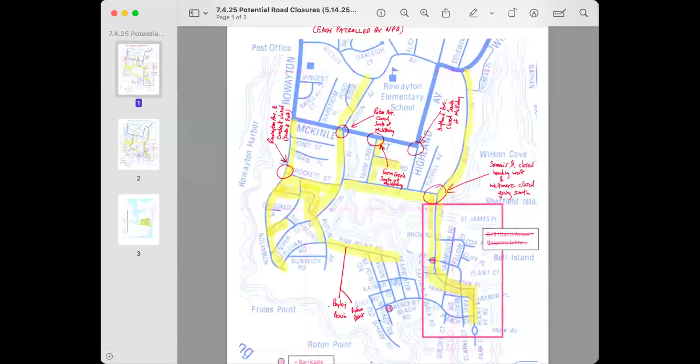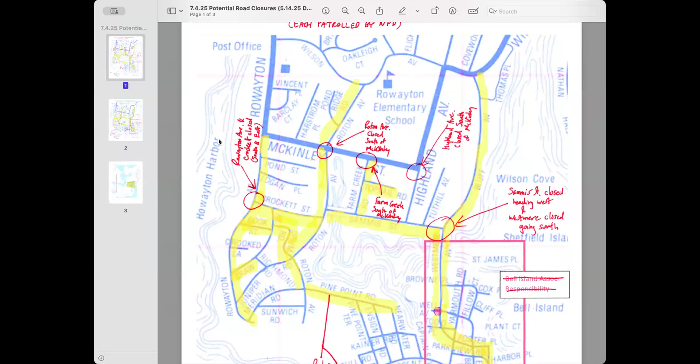So everything highlighted in yellow is going to be no parking, and we have designated specific areas that we've circled. Obviously this is a rendering, we're going to do a much better job depicting this as we get closer to the event. But as you can see here, road closures prior to the fireworks display - so we see where each area will be patrolled. And these are road closures after the fireworks display.

There's a few anomalies here for everyone's reference. There's two beach clubs, so we're in communication with both to ensure they're moving their traffic away from the perimeter of Bailey Beach, where 85% of the traffic will be coming out of. This is again handwritten, but gives you a bit more perspective on some of the evacuation routes and things we're working on. We will make sure this is uploaded, and we did share this with the Norwalk Police Department last week.

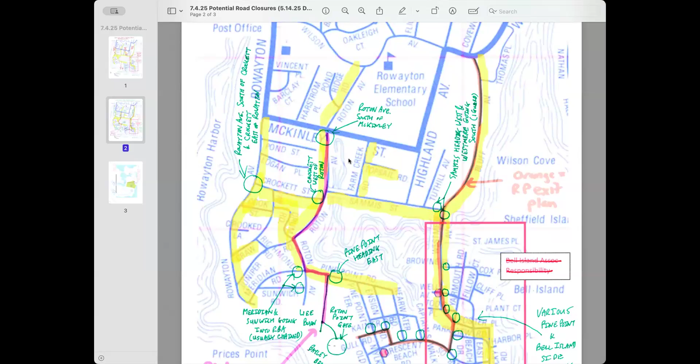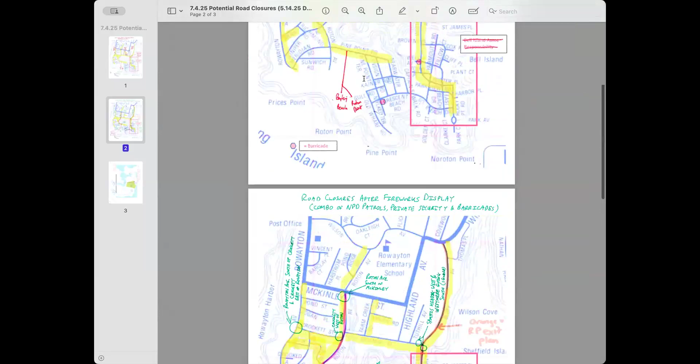And would there be sufficient detour signage with regards to the closures? From my perspective, from the RCA's perspective, yes, we're going to be working closely with Norwalk Police to ensure we're in compliance with what that should look like. Including the traffic authority, right, with regards to the detours - if a person sees something closed and there was no signage prior, there could be an issue there, right? Correct. Yes sir, so go ahead Commissioner Palladino.

Is this going to come before the commission like normal road closures do, or has this already been set? TMP staff has not reviewed this particular set of road closure maps. It seems like Norwalk Police Department may have discussed this with them, but with the events on July 4th, there is a potential we could bring this before the commission one more time at next month's meeting. And if the chief feels that's not needed, and the rest of the commissioners concur, I'm good with that. Not unless the board wants to.

Tony, do you have any comments on Commissioner Palladino's suggestion? The only suggestion I could consider is subject to the traffic authority's review and consideration, that it doesn't obstruct - that the closing of these streets are well planned and the signage is there to detour the traffic, and it's not going to create some bottleneck that we can't anticipate now. Okay, that's a very good reason for

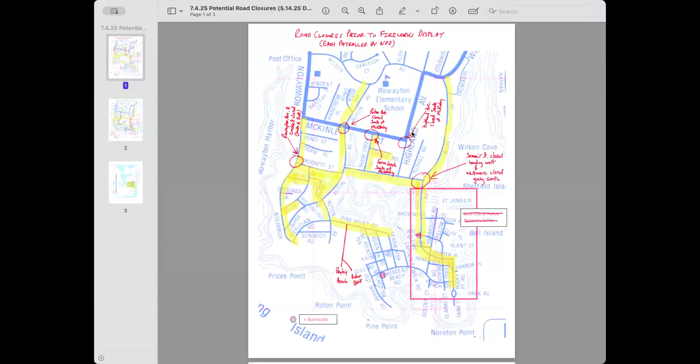That's Connecticut State. Yeah, so the route that trucks are supposed to be taking, if they're going through Rowayton, remains open. I think during the event itself, local deliveries would be limited, but I think that applies to all traffic, and it's going to be a Friday night, a holiday night, so I think that's going to be pretty limited, if at all.

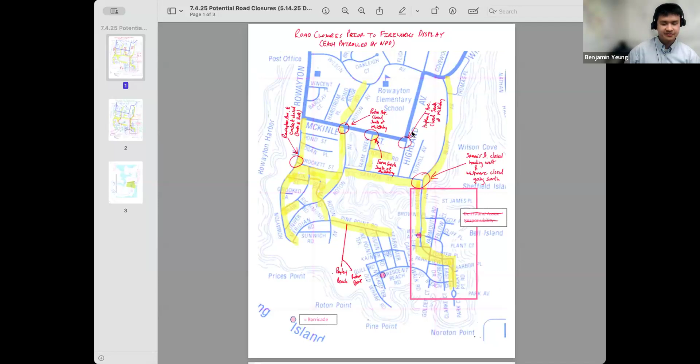Thank you, Mr. Yeung. Are there any other questions, commissioners? Police department? I have none.

Okay, well, I will entertain a motion to approve this application based upon our discussion of having a detailed map drawn by TMP, have it coordinated with the police department, and that's it. I move section 5, item B, subject to approval and coordination with both the traffic authority and the police department on approving the proposed exit route for the Rowayton fireworks.

All right, all in favor? Aye. Aye. Aye. The ayes have it. The item is approved.

Our next item is item C. May I have a motion for discussion? Approve proposed full closure on North Main Street, Washington Street, and South Main Street for the SoNo Arts Festival.

I need a motion for us to discuss that. I'll move section 5, item C, approve proposed full closure of North Main, Washington, and South Main Streets for the SoNo Arts Festival. Okay, it's been moved by Commissioner Palladino. What staff, is that you, Benjamin, again?

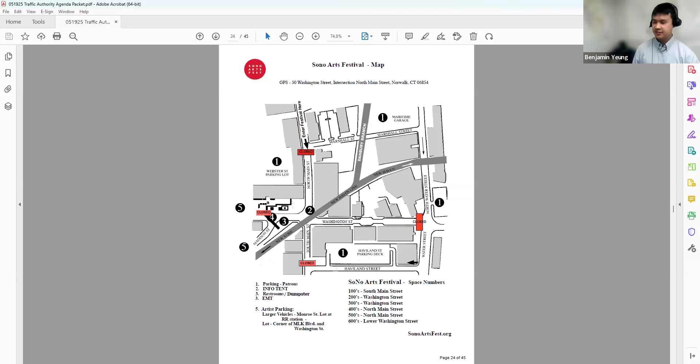We have the event lead, Sue Brown Gordon, in the audience here. I'm here, can you hear me? All right, Ms. Gordon, good afternoon. You can lead the discussion on this event.

Certainly, thank you so much for having me. I've been with this event on and off for almost 35 years, and it's been running very smoothly. We're not making any significant changes to the footprint or any of the closures from last year, which I think we'll all agree went very smoothly.

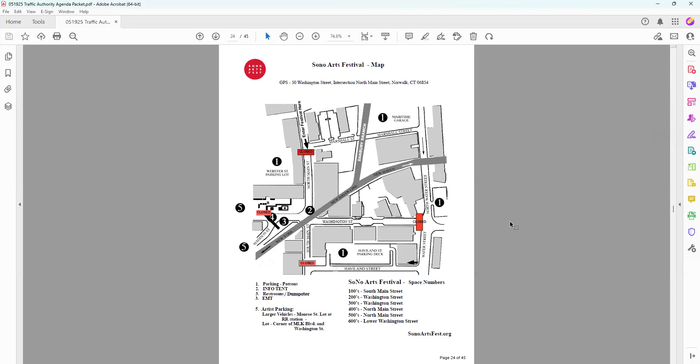No major changes. I'm going to meet with police to make sure that they're happy with everything and comply in any way to any of their recommendations. And I'm happy to answer any questions. While it is a big event, we've been doing it successfully for all these years.

And unless you have any suggestions, I think that we're going to continue the way we've been doing it, and we were very pleased with last year. So I'm here to answer any questions or concerns that you might have.

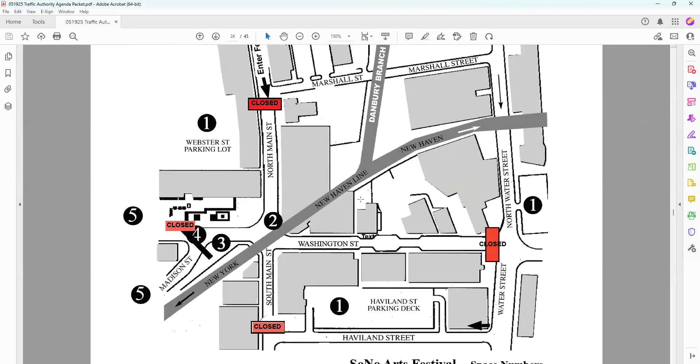All right, commissioners? I have none. From the past years, we haven't had any incidents or issues, and as you said, nothing has changed. So I can't anticipate other than something I'm not aware of, but it looks good to me. So I have no questions.

I have no questions. I just want to say that this is really a great event that we have in Norwalk annually. I have a picture that I bought when I went my very first time, and I enjoy looking at it every day. So I think that all is in order.

Chief, are there any concerns that the police department has about this event? No, Commissioner. Okay, all right.

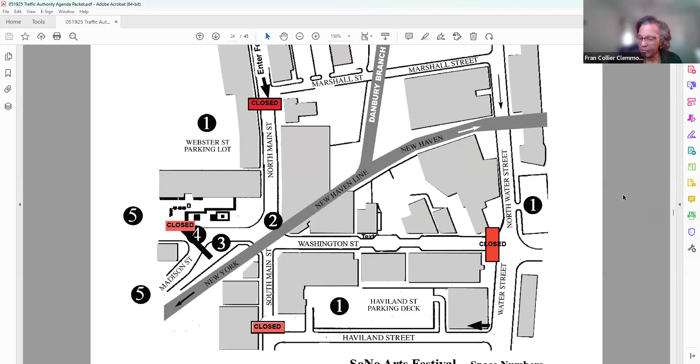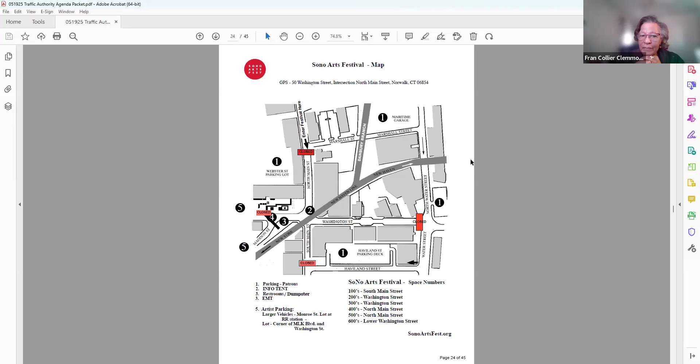I will entertain a motion for approval of item 5C. I need a motion to approve. Motion to approve item 5C. All right, all in favor? Aye. The ayes have it, and it is approved.

Thank you, good luck, success this year. Thank you very much. And I just want to state that I'm a Norwalker. I've been here since 7th grade. It's an honor and a privilege to provide art for our town, and I'm grateful to be here. Thank you so much.

Thank you. The next item on our agenda is item D, High and Knight Street one-way conversion. I need a motion to discuss that. I move section 5, item D, approve the one-way direction conversions of High Street and Knight Street.

All right, thank you. Mr. Young, would you lead us into the discussion? Thank you, Commissioner Collier-Clemmons. Actually, Mr. Garrett Balella from TMP will be leading the discussion on this one. Okay, great, thank you, Ben, and good evening, commissioners.

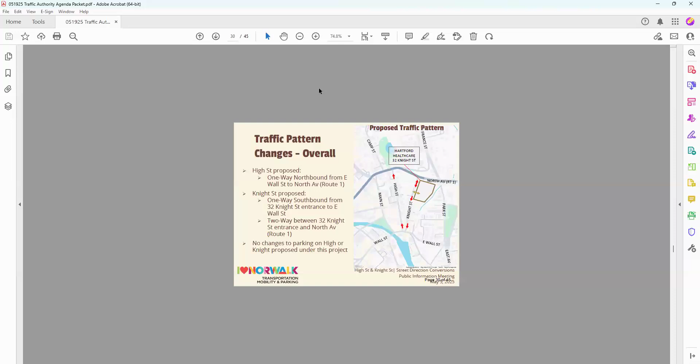I just want to make sure you can hear me all right. My apologies, my video isn't working today. I just switched over laptops and I'm having some camera issues. But I'll ask that my team share the presentation. We provided a lot of information in the packet. I wanted to provide a high-level summary and overview, and then also be available to answer any questions you might have.

The item before you tonight is to approve the one-way direction conversions of High and Knight Street. I want to emphasize that both of these roadways today are already one-way. We're simply providing a recommendation to convert High Street, which is one-way southbound today, to one-way northbound in the future, between East Wall Street and Route 1. And also to convert Knight Street, which is one-way northbound today, to one-way southbound between 32 Knight Street, which is the new Hartford Healthcare building, and all the way down to East Wall Street.

So this project largely originated to address historical operation and safety challenges that we have on Wall Street, East Wall Street, at the intersection of High and Knight. These are existing operational and safety challenges, and it's crucial at a time when we're investing nearly $30 million into the entire Wall Street neighborhood, that we make these changes to accommodate the future neighborhood plans, which had a tremendous amount of input and feedback from the community.

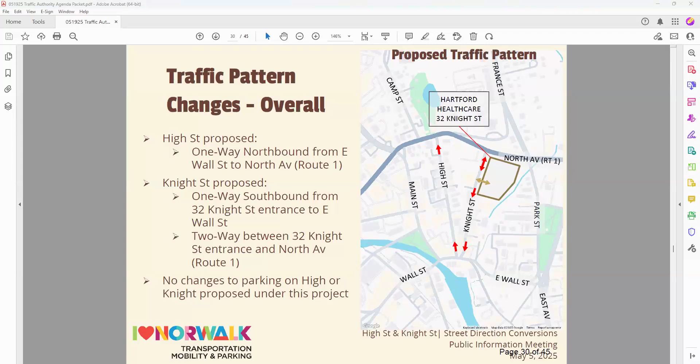So I'll ask you to go to the next slide, Ben. This slide really illustrates the issue that we have at hand. The operational and safety concerns I'm speaking to today are largely a product of two things. The first is that the roadways of High and Knight Street intersect at a very sharp angle. We're limited with our right-of-way, and we can't really rebuild the intersection configuration and change the alignment of these roadways.

So what we did look at is the circulation, and today there's a counterclockwise circulation between High and Knight Street, with High Street being one-way southbound and Knight Street being one-way northbound. It really exacerbates this issue, which you can see here in yellow, of people and drivers making illegal contraflow maneuvers from High Street to Knight Street, directly opposing cars coming down the hill from East Wall Street and traveling to the west. So this is a challenge we've recognized and that we're looking to address with this potential roadway conversion.

Additionally, you can see from this diagram just the way the roadways are aligned today. The reason this illegal movement happens so frequently is that it's very difficult for someone to come down High Street, cross the double yellow center line, immediately make a left turn, find a gap in traffic, and then head over to Knight Street. So the roadways just really weren't designed to accommodate this movement.

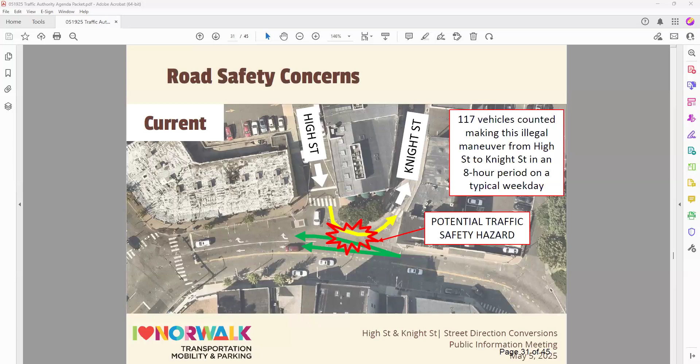If we could go to the next slide, Ben. This slide shows the issue at hand that we're trying to resolve. You can see the vehicle traveling east at the very top of the picture by the lights in front of Ahi, and then you can see vehicles coming down the hill on East Wall Street.

So while for many years we couldn't switch the roadway configuration, maybe because the sight lines coming out of Knight Street weren't adequate, this new infrastructure we're building now makes that possible. It makes it safe, creates lower speeds, and will create gaps for people and business owners to get out of Knight Street.

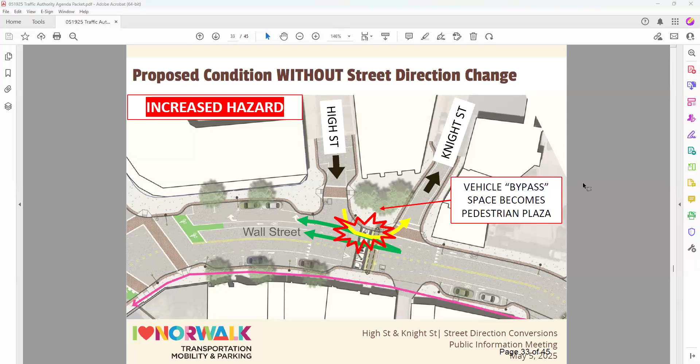Okay, commissioners, your questions? Yes, I have a question, Mr. Bolello.

So I think it's self-explanatory, and definitely an improvement. My question may not pertain to what's at hand, the change in the directional, and it's more of a suggestion. That might not be relevant to this discussion, but that whole intersection, I don't know if there are other plans to mitigate the blocking of traffic, especially with the change now in direction.

No, and that's a really great point. This is just one isolated intersection. Certainly making these roadways, when you change the direction, you can circulate the neighborhood by only making right turns, whereas today you have to make a left from High Street onto East Wall Street, cross the centerline, and go back over to Knight. Same thing if you're circulating these two roadways - you have to go north, take a left onto Route 1, then another left to get back into the neighborhood. This proposal simplifies that. You can drive these two roadways and make only right turns.

So I think that's part of the solution. I hear you on some of the challenges with the lights and the queuing, and that's something that as part of the larger project we're going to make investments into all the signals. We're also looking at bringing technology we've successfully employed in other parts of the city - adaptive traffic signals, which measure demand in real time and make real-time adjustments. All of that is going to be looked at in the broader design. I think this sets the table as far as the infrastructure, but I certainly hear you with regards to the lighting and queuing. We're looking at this holistically.

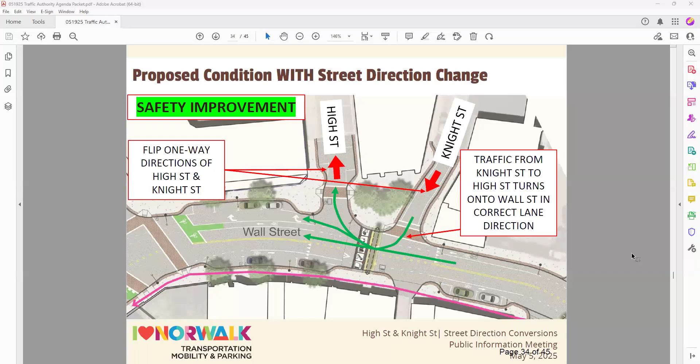I know Ben actually met with the business owners and marked out on the street with paint to show just how far the curb line is changing. If you go up one to the graphic that shows 20 feet, you can see from this graphic the blue line - we're moving the curb 20 feet from where it is today. So that issue, while hard for some business owners to wrap their heads around, we met with them in the field, we walked it with them.

They're worried about their vehicles being able to egress the street, find the gap in traffic and turn safely. This is going to be a really low speed environment. You have the raised crosswalk, curb extensions, speeds are going to be slower coming down the hill. So not only are there better sight lines now, the speed of traffic is going to be much lower. We believe we've addressed those concerns.

The other major concern we heard from businesses is making sure the curb radii, corners, and any parking modifications on the street accommodate their vehicles now heading out southbound, which we think we've addressed with this design. Should there be any minor parking limitations needed for a vehicle to pull out south into the street as opposed to where it used to go north, we're readily available to implement those parking restrictions in the future. But those were the two primary concerns we heard from the businesses.

And Ben, if I missed anything from your conversations with them, please feel free to add. Yeah, no, those are the main concerns. Thank you. Thanks.

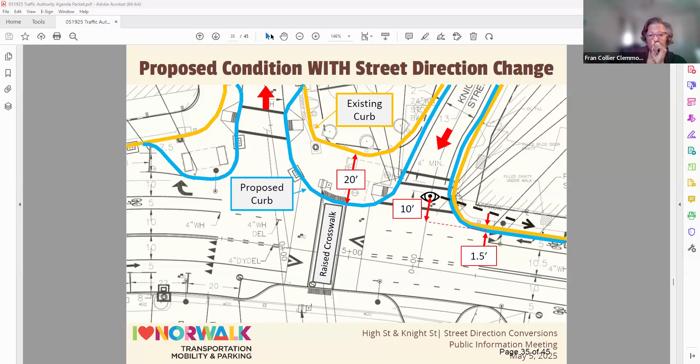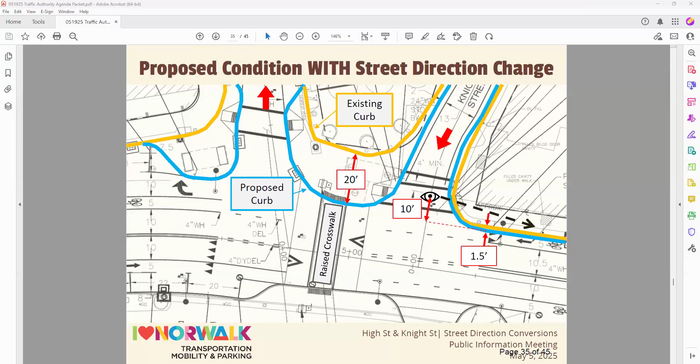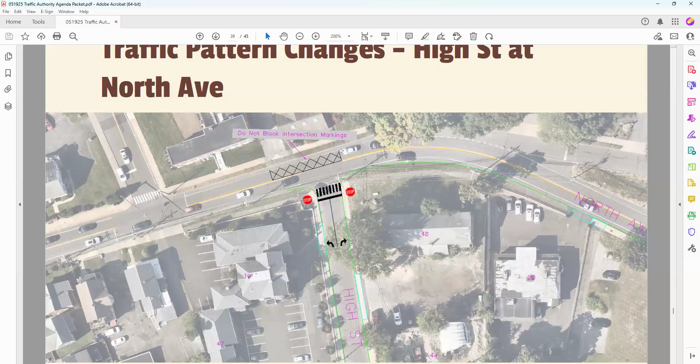So we're looking at possibly 6 to 7 months from this meeting for this switch in street directions to occur. Yes, so we wanted to get in front of you now because the project is under construction and we're going to move to the northerly curb within the next few months. The next item will show there's also coordination required with CTDOT regarding the reconfigured one-way operations and improvements we can make on the High Street approach to Route 1. We wanted to ensure adequate time to get these enhancements approved and plans ready for a contractor to complete, so the project takes off successfully.

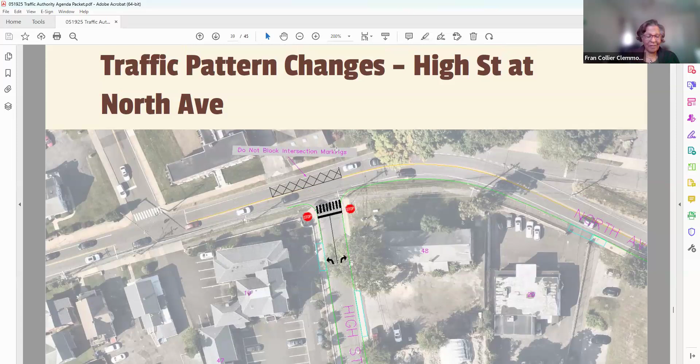Okay, I'm not going to discuss what I'm looking at now because that's in our next application. My apologies for jumping the gun. That's really the rationale - we want to make sure we complete the process with CTDOT, as these roads both touch Route 1. Okay. All right.

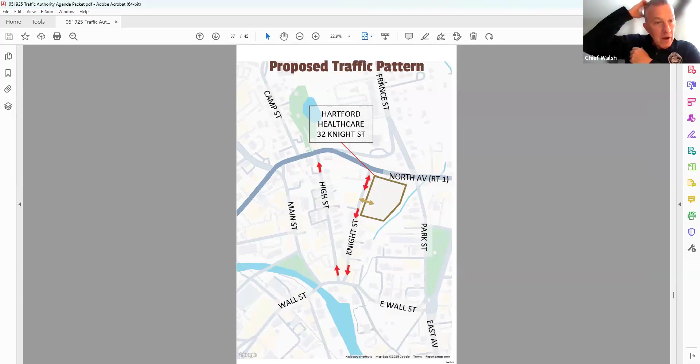Are there any other questions? Chief, do you have any concerns about what effect this might have on the police department with the change in direction of these streets? No, I think these would be good improvements for that area. I think it'd be good. It's good improvements and it's needed.

Okay, all right. If there are no more questions or discussion, I'll entertain a motion for the approval of the High and Knight Street one-way conversion change. I will move forward that conversion change for High and Knight Street. All right, all in favor? Aye. Aye. Aye. The ayes have it.

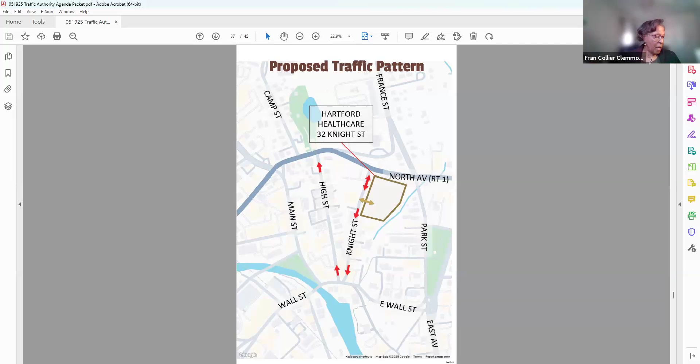It is approved. Now we will move to item 5E, do not block box at High Street and North Avenue. I need a motion to discuss this. I move section 5, item E, approve the installation of a do not block the box on North Avenue westbound at High Street. Okay, Garrett, will you continue leading the discussion on this?

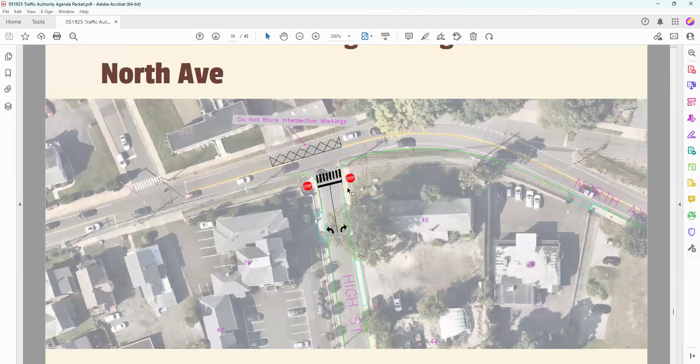Absolutely. Ben, if we could put up the concept. So in doing our due diligence and looking at this in great and exhaustive detail, our proposal for High Street as it approaches Route 1 in the future would be to do a separate left and right turn lane. This is very similar to what exists on Knight Street today and will remain in the future for that section of the block in front of Hartford Healthcare.

But we also wanted to be proactive, and we collected traffic count data. We looked at how people traveled through the area. While there's a much smaller percentage of left turns here, we wanted to make sure they had a lane where they could comfortably wait and make a decision to merge onto Route 1 during peak hours without being rushed or honked at, and allow the right turn movement to freely flow after stopping to reduce delay to the neighborhood.

So this approach, what we also looked at in being proactive, is to look at do not block the intersection markings. There's a signal to the west, Camp Street, and at times the queue does extend. I think Commissioner Lopez was specifically talking about queuing before. This is one proactive improvement we can look at to make it easier for drivers to egress the street during peak hours, when sometimes vehicles don't realize where they're stopping in relation to an adjacent intersection. This would be a proposal that needs to move through both our ordinance committee, to add this intersection to the list of intersections in the city that get this treatment. But we also have to work closely with the state. We do think this is a value add, and we want to make sure we're doing everything in advance to make this project as successful as possible.

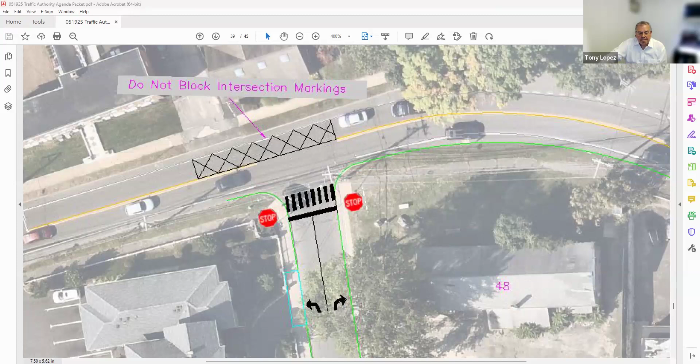Commissioner Palladino, do you have any questions? I have no questions, no. Chief, thank you. Any concerns for the police department regarding this change? I know there are no concerns.

Okay. Now, I notice according to the map that do not block the box is only on the westbound traffic side. Is that correct? Yes, that is correct. That's because of the proximity of the Camp Street intersection. It's not on the eastbound lane just due to the proximity of the next intersection being several hundred feet away, and we don't see queuing impacting that lane across High Street today.

Okay, all right. So if there are no more questions— just to follow up to your question, Commissioner, if I may, or if you could help me understand relating to that eastbound lane, that's where you're not going to have the box. You said because there's another intersection, but what about traffic? Does that not potentially impede traffic from making a left from High Street?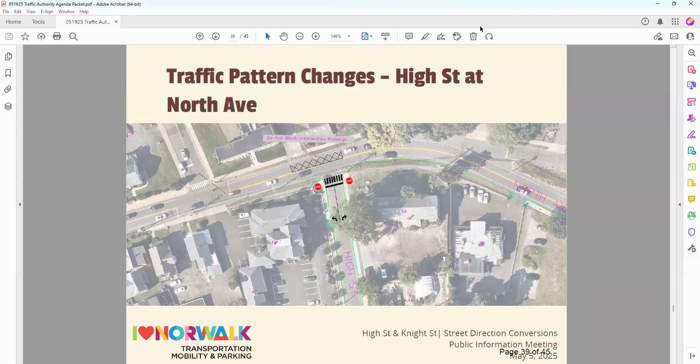I would suggest that you could make it conditional because it's not our roadway, it's the state roadway. So conditional on the state's recommendations. And this process actually has to go through not only the state's review process, but also will be presented to the ordinance committee to add this. So we'll have more information to provide at that time. This is really just to start the process and start our conversation with CTDOT.

Okay, so the third party we're talking about is the state, right? Yes, it is the Connecticut Department of Transportation, correct? Okay. All right. Based upon the discussion, questions that have been asked and answered...

I need a motion to approve the proposed traffic pattern changes at High Street and North Avenue. I move approval for section 5, item E, approve the installation of a do not block the box on North Avenue westbound at High Street.

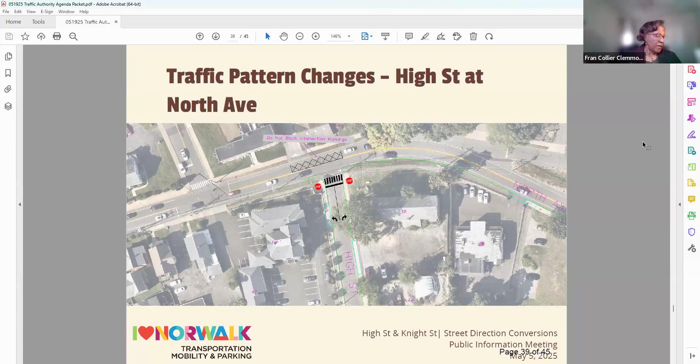Okay, all in favor? Aye. The ayes have it. It is approved. Our next item for discussion is 5F, Porch Jam.

Porch Jam 2025. I need a motion to discuss this. I will put the motion forward for section 5F for the Porch Jam event.

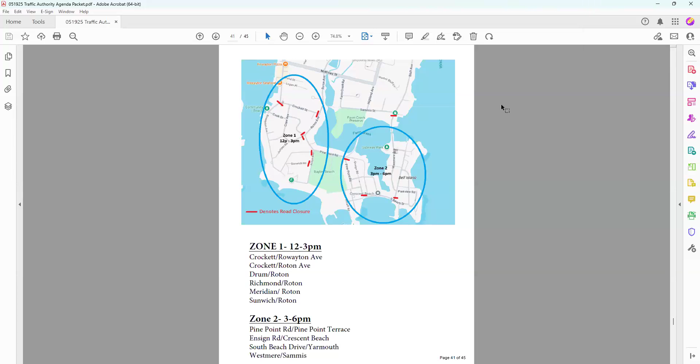Commissioner Palladino? I have no questions at this time. Do they use the same houses as in the past, or are these different houses offering? Great question, Commissioner. I would say 60% of the homes are static and used year over year, and then there's always new homes and new families looking to host. They love the give back and the charity that it stands for.

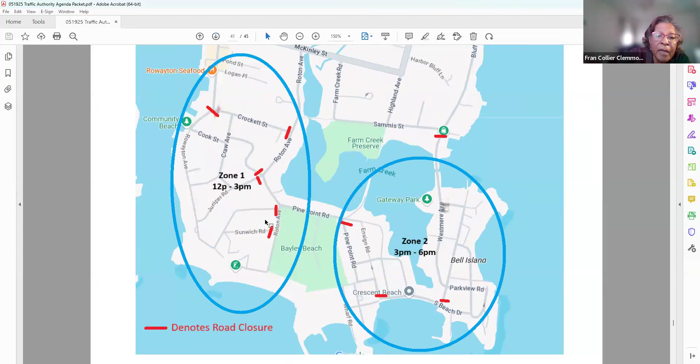Okay, could you make this map just a little bit larger so I can see? Yes, thank you, that's very helpful. So the road closures are going to be at Sunwich, and I don't know what that street is, I can't see it, there's a name. Crockett. Yep, most of the entry barriers around Roton Avenue. Crockett is a big one, and then Crockett and Rowayton Avenue.

And then those barriers will be taken down at 2:30, 3 o'clock. Commissioner, yes, okay, and then move them to zone 2. Yes. Okay.

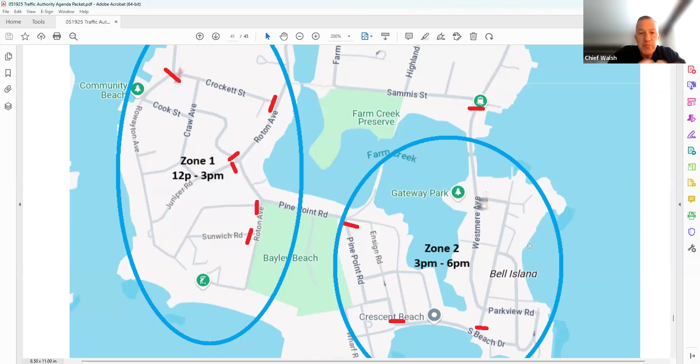Chief, do you have any issues with this application and these closures for the police department? No, we discussed both events, the fireworks and the Porch Jam, last week at length. This is a much better plan from previous years, with the perimeter set up in the two different neighborhoods. The RCA has a much better plan from the last permittee in doing this event. Okay, so yeah, it looks good.

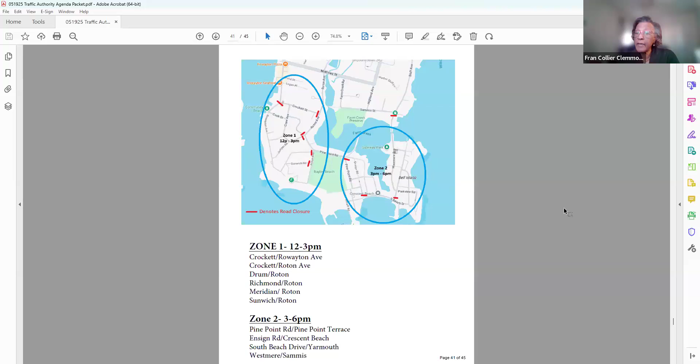Are there any other questions? Anything needs clarifying? Okay, well, all in favor, I need a motion to approve the Porch Jam 2025 as submitted. I'll move Section 5, Item F, for the Porch Jam event. That has been moved by Commissioner Lopez. All in favor, let it be known by aye. Aye, aye, aye. Motion passes.

Item G, thank you. You're welcome. Item G, 467 West Avenue, parking approval. I need a motion to discuss this item.

Commissioners, I need a motion to discuss item G. I'll move item G to approve metered time parking spaces on West Avenue, Orchard, Quincy, and Butler.

Okay, and we have Mr. Fankhanel. Yes, perfect. Okay, to lead our discussion. Thank you. Hi, Commissioners. So I'm sure as you're all aware, there's a new apartment building going up on the

corner of West Ave, Butler Street, and Orchard Street. Basically what we're presenting to you today is that, upon completion of the construction, we'll be putting in our normal metered parking spots on Orchard Street, West Ave, and Butler Street. And then Quincy Street, which is behind the new building, we're proposing that that's just timed, so that's going to be unmetered.

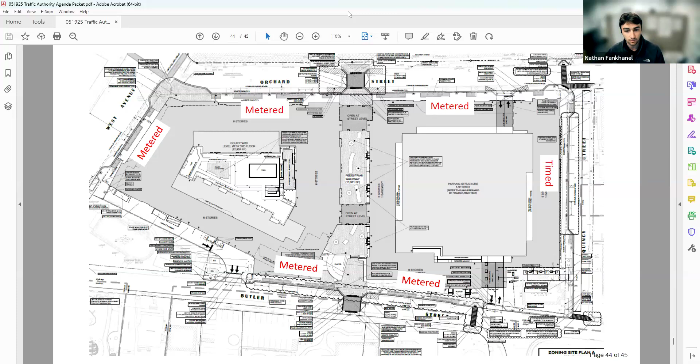If you guys have any questions, I can answer. Commissioners, are there any questions? The only question I have is, is this the same as throughout the city with the use of the apps, Park Mobile or whatever that is? Yes, it's currently our system, Park Mobile. It's my understanding that we're going to be moving to a new system very soon, but yes, it will be the same as every other metered parking spot in the city. Thank you.

Commissioner Palladino? I have no questions. Are there any issues for the police department regarding this request? No, ma'am.

Okay, I need a motion for approval of the application for the parking at 467 West Avenue. I will move that forward for the approval of 467 West Avenue building. Commissioner Palladino has made the motion for approval. All in favor? Aye. Aye. Aye. The ayes have it. It is approved.

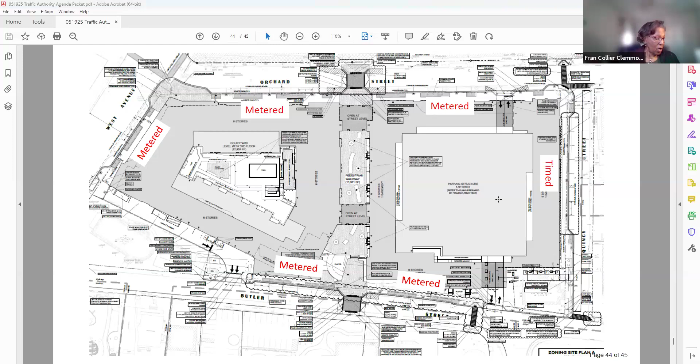All right, this completes our new business items. And our next item is for adjournment. I have one quick go-back. Okay, we had a letter that was read from the East Norwalk Association.

In the letter, it asked for time, as it was an item that was on the agenda. It is not on the agenda. So it not being on the agenda, we really cannot discuss it. I agree. Correct, according to the rules. However, the concerns within that letter will be addressed and will be looked at by TMP. We will, Benjamin or Garrett, someone who will get back to her on the issues, the bulleted items that she has in that letter. And we need to know what that is before you talk to them. Thank you, Commissioner Collier Clemmons, for the clarification for the record. Okay, yes, thank you all.